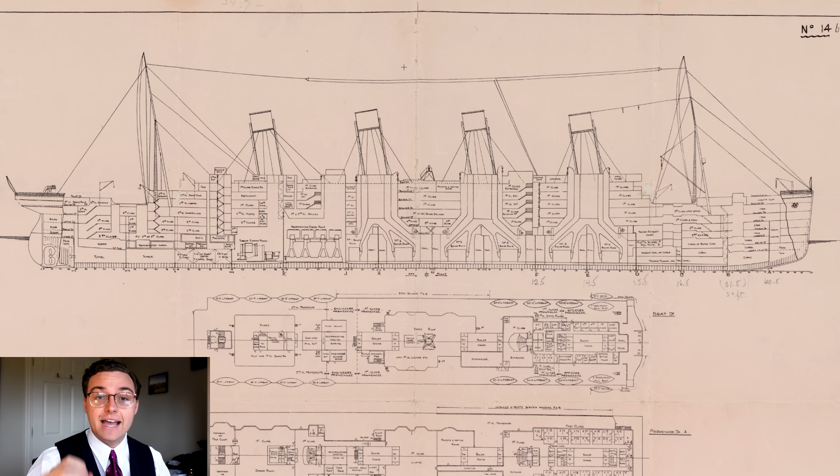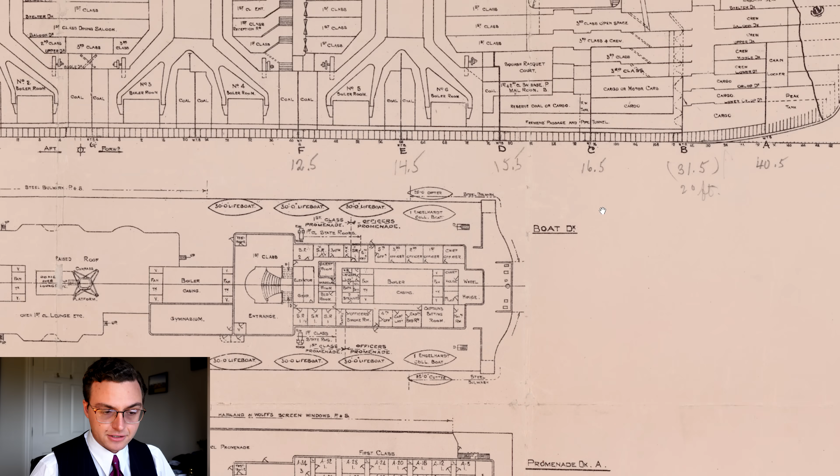Now, just to zoom in and give you a bit of an idea of what these plans look like in the first place. They're pretty basic looking when you take a look at the side profile here. It's a very simple layout of the side profile of the ship, the general arrangement, the decks and that kind of thing. But where there's a lot more detail is down here on the decks below.

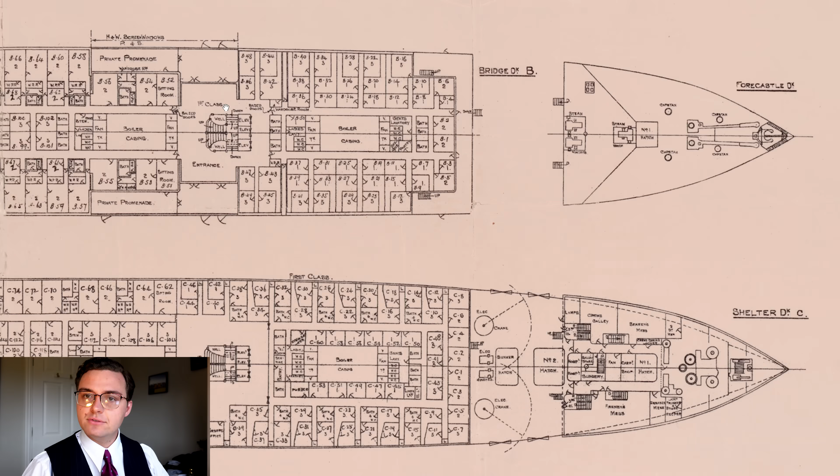Now, unfortunately, this one only goes down to C deck. So it shows all of the exposed decks where you would have had literally decking, weather decks exposed to the elements. And then everything below, D deck, E deck, F deck, we can't see. The truth is, though, these are probably some of the more interesting decks on Titanic. So let's have a look through and see what this tells us about the Titanic, and some of the differences between this plan and some other plans that you might find online.

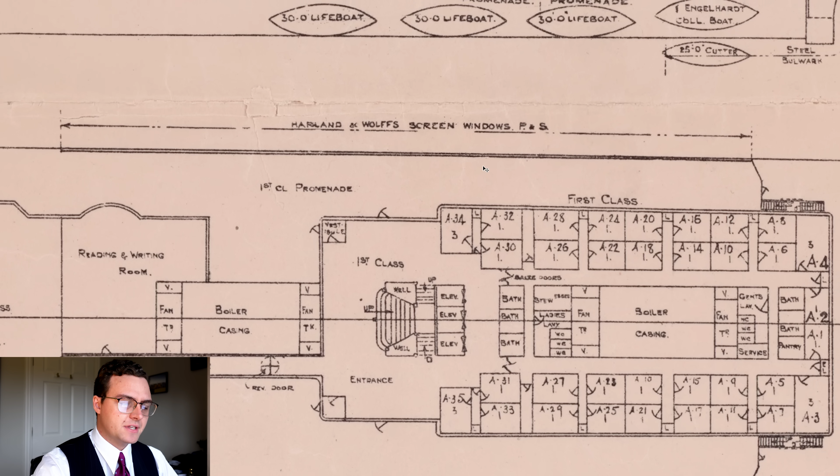Now, already what's kind of unusual about this plan that marks it out as being a little bit different to others is that, for one, it shows that they installed the screens. So the Titanic's promenade was half enclosed to provide some shelter for first-class passengers when they were walking. And it's actually been marked out on this plan, which is unusual because this was a very, very late addition to Titanic. She had originally been intended to have this large exposed open promenade like Olympic had,

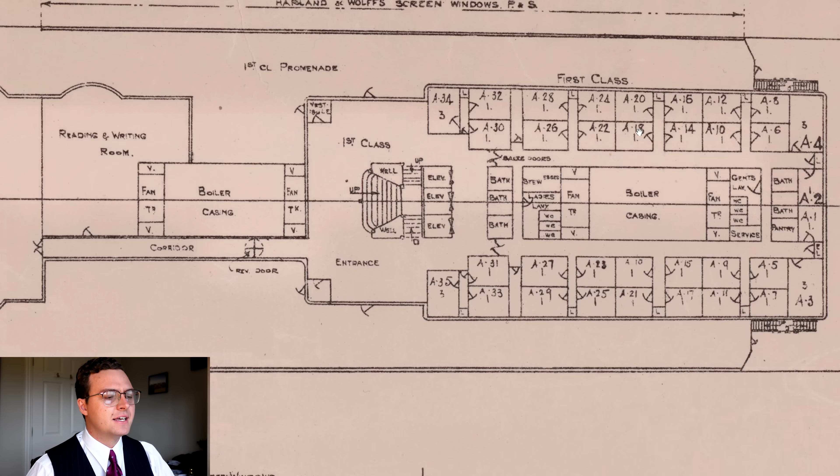except that in the event, Harland and Wolff down on B deck, with White Star Line's direction, ended up converting what was a very, very long enclosed promenade into some of the finest suites on the ship. Beautiful staterooms and things on B deck. So you can see here on the port side, we've got B18, B22, B28. On Olympic, at the start of her career, these didn't exist. This was just a clear walkway.

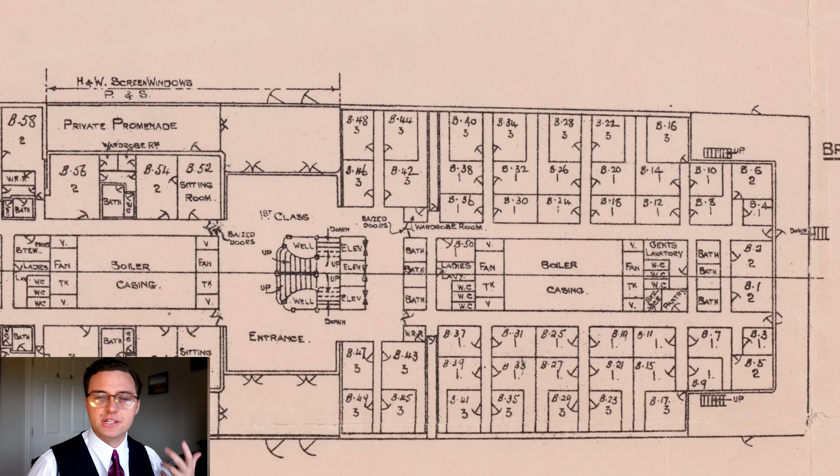And eventually Harland and Wolff, with White Star, after doing tests on Olympic and seeing how she was going, realised that actually people probably aren't really using it that much. That's a lot of walking space just for first class. Better to use that tonnage, that internal space, for things people can spend money on, like, for example, nicer staterooms. It meant, though, that they deleted the enclosed promenade. Now, to counter that, they put some screens up on A deck, which was the open promenade, converting it to like half and half, which would have been pretty nice and sheltered.

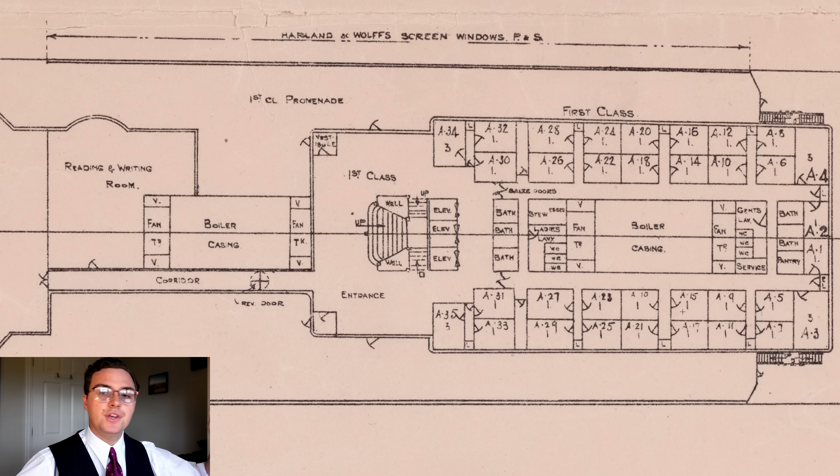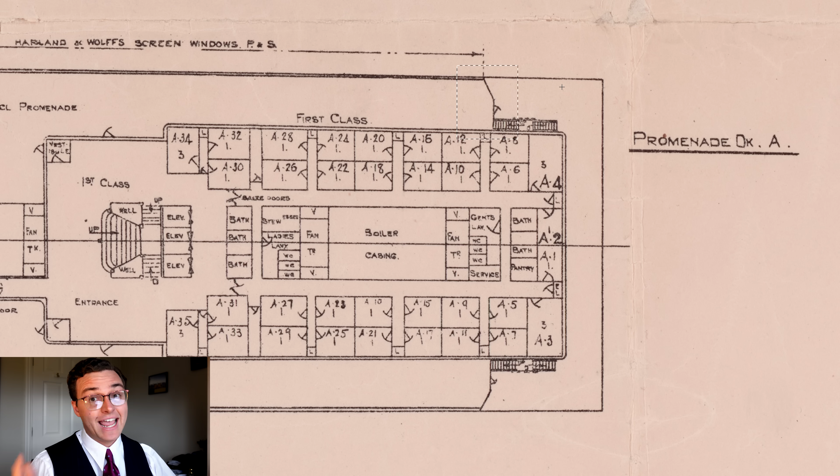You can see actually at the forward end here on A deck, there are these screens with doors on them, so that would have prevented wind from ripping down the promenade deck. Anyone who's ever been at sea on a big ship like this or taken a transatlantic voyage knows just how windy it can get even during the summer. The ship's already doing 21 knots, 22 knots forward, there's a lot of wind coming back at you, especially if you've got a headwind, then it's kind of like double that speed. So anything you can do to give as much protection to your passengers is a bonus.

So on Titanic, they've installed these doors. What makes the plan a bit weird is that they've actually marked it out on the plan where the screens are and where they end.

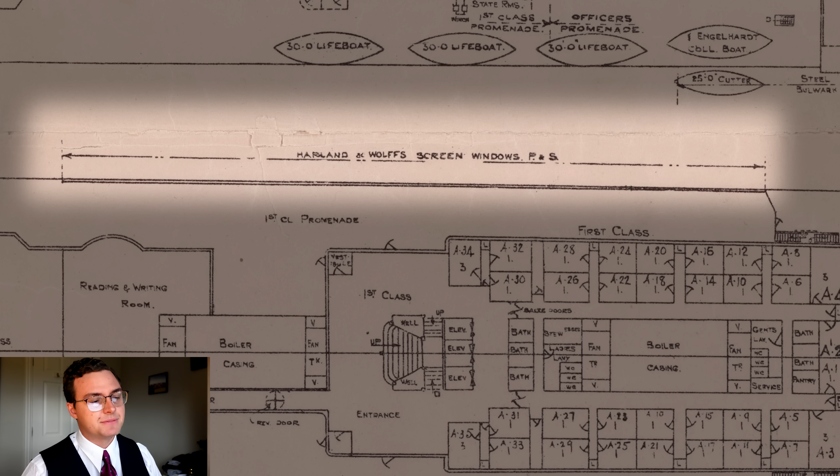Which, like I said, is pretty unusual because this was a last-minute change to Titanic's design. Relatively last minute. You can see when she's being fitted out, that promenade's nice and open. It's led a lot of people to kind of get confused and mix photos up between Titanic and Olympic. But it's a little bit unusual to have a period plan.

So one thing I've always wondered is, why does this plan exist? Why was it made? And I've never really known the answer to that. I had assumed, because it was in the American National Archives, that it had somehow got to America. Great assumption on my part. Why? Well, we know, of course, that there were a series of inquiries into the Titanic disaster, the first headed up by US Senator Smith, right after the disaster in 1912.

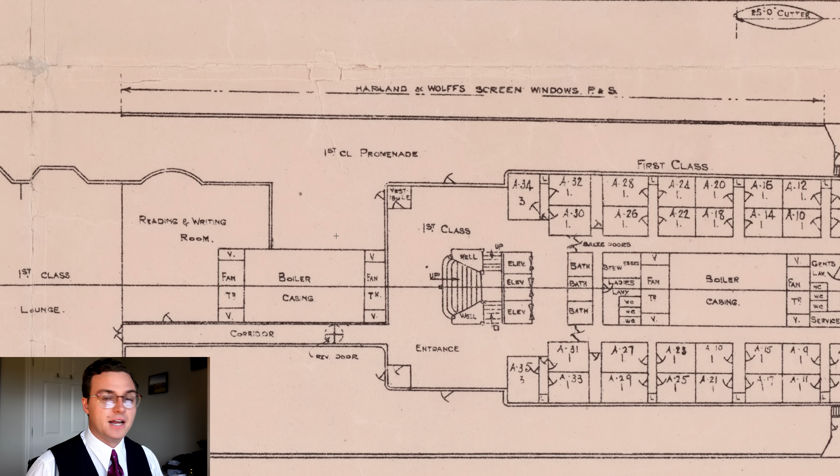But a friend of mine, a researcher, Troy Cullen, who works with Titanic Honour and Glory, told me that these plans probably date to about 1915, when there were further hearings for limitation of liability and that kind of thing. All the claims that were being heard by the White Star Line. We did a video on that just recently. It's a really interesting story.

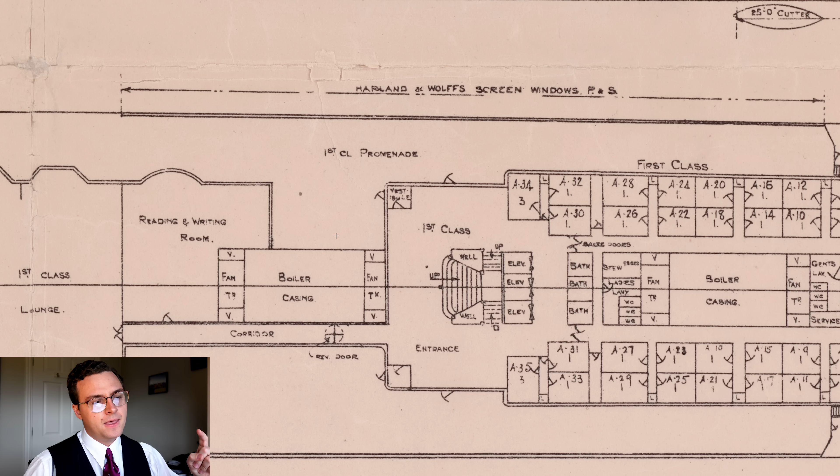And so these plans were used to essentially show where the particulars of the ship were, explain how people might have got to the boats and that kind of thing, because they were trying to find if Harland and Wolff or White Star Line might have been liable for the loss of their ship, damages, loss of life, and that kind of thing.

The reason the location of the screen installations here is important is because if you look at the decks above, you can see that there are lifeboats gathered forward, and of course the deck below, A deck, is screened off there. This kind of had an impact on the night of the sinking, because Captain Smith had ordered his boats lowered to A deck where they could be boarded by passengers, because that was the right thing to do. That was the official evacuation plan for the Olympic class, Olympic and Titanic.

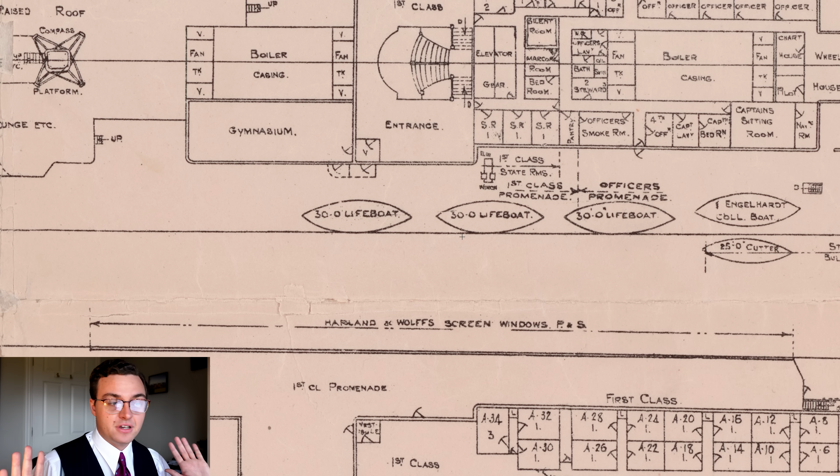Obviously neglecting or forgetting the fact that the forward boats had been screened off, and there were these windows there which had big hand cranks. The crew needed to go and find the cranks, try and get the windows down. In the event, one lifeboat was half lowered down to A deck and kind of neglected and forgotten about for the rest of the sinking right until the end, because they couldn't actually get the windows down in time. And eventually it got away. But obviously it created a little bit of confusion.

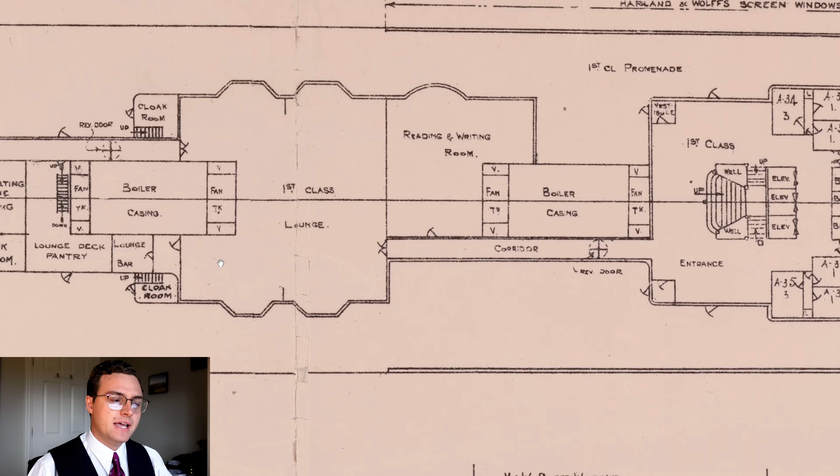So with that last minute addition, they probably didn't update the evacuation plan, or if they did, Captain Smith, in the event, kind of forgot about it. So it's interesting that that screen change is included on the plan here. Whereas down on B deck, if we look down here, now this is towards the stern of the ship, another big change that they made to B deck was the addition of a Cafe Parisien on Titanic.

Now this was meant to be a nice light and airy kind of cafe, and it was clearly a very last minute change, because in essence, the restaurant here, the à la carte restaurant, sometimes called the Ritz restaurant, was additional to your fare. You had to essentially pay extra, so you ordered off the menu like you would in a normal restaurant. It wasn't included in your first class fare. It was so popular on Olympic that they ended up extending it out on the port side of the ship, the left-hand side of the ship.

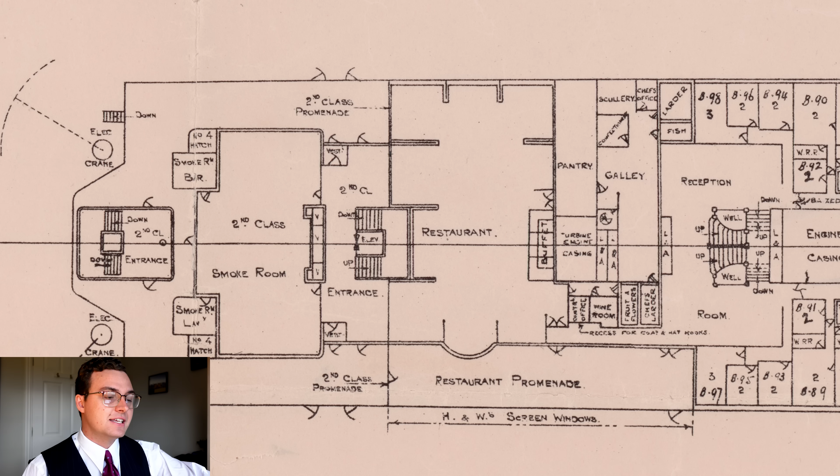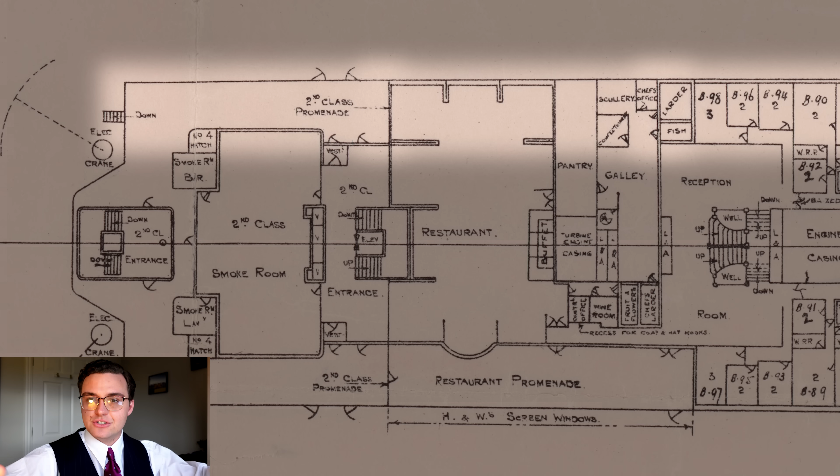So you can actually see here, it's very clear to see where they've made these clever changes, because the cabins are over here on the right, the promenade is over here on the left, and in the middle you've got the restaurant. Now, originally on Olympic, that was all open promenade, so you can actually follow the line of the bulkhead where it would have originally been, here's where the inside of the ship ends and here's where the promenade is. But White Star Line has very cleverly used this space for new things, new rooms, that kind of thing.

Now, on the starboard side of the ship, on the right-hand side, the White Star Line had made provisions for what they had originally termed a restaurant promenade, and it seems to me that they've just kind of reserved this space, partly because one of the criticisms of Olympic's original design is that this was originally second-class promenade, and they could look in the windows at the first-class passengers eating lunch and dinner at the restaurant, which is probably not what you want. A little bit voyeuristic. So there was originally a plan to just maybe have a promenade there, and they maybe didn't really know what they wanted to do with the space.

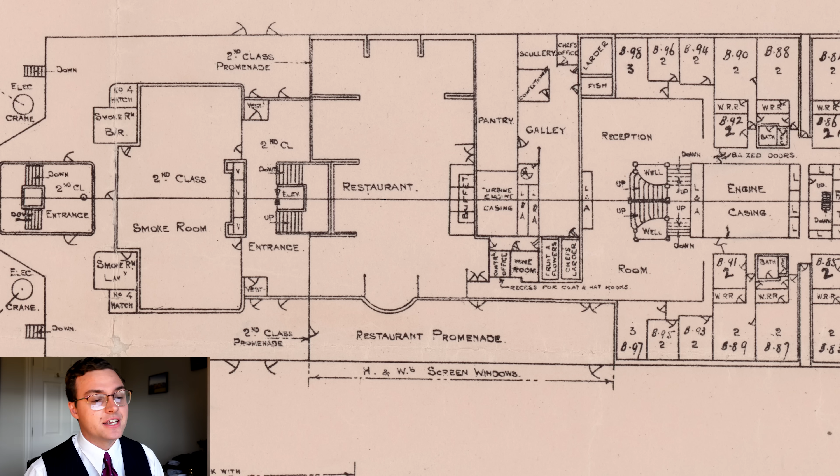In the end, in a very clever, again, last-minute change, they installed what they called the Café Parisien. It was essentially just lattice work on the wall so they could have ivy placed on it to make it look like a garden. I'm fairly certain the ivy was fake. And then just some very light wicker furniture. And boom, you've now got a new space where passengers can kind of sit and sip their tea and just relax. And it ended up being extremely popular.

More popular than other first-class spaces on the ship, like the reading and writing room, for example. And so, in the event, it was also put on the Olympic and slightly improved. The decor was a little bit nicer. So yeah, it's a really nice little room. But it's interesting that on this plan, you can see that they still kind of didn't really know what they wanted to do with it, and they just called it a restaurant promenade. Like, oh, we'll just put a restaurant promenade here.

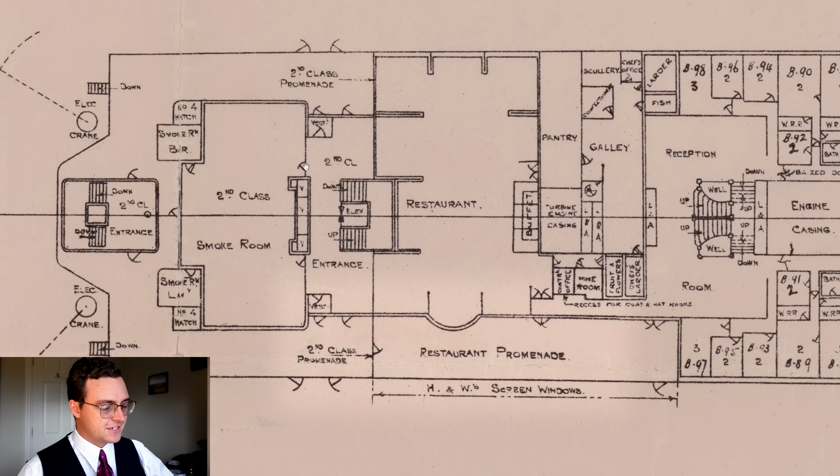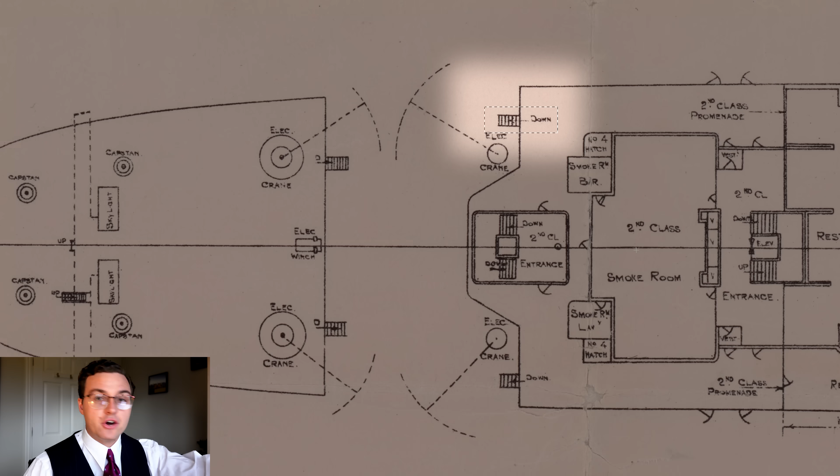One of the other things interesting about this plan is that on a lot of plans called Titanic that are clearly actually Olympic, you'll see that these stairs in particular here that go down from B deck into the well deck at the stern of the ship are in the correct position that they were when the ship was finished. They're sort of centrally located right at the end of the promenade there on either side of the ship. But the original plan for Olympic and Titanic had them coming out at a really awkward angle just here. So they would splay outwards from either side of the second class deck house here.

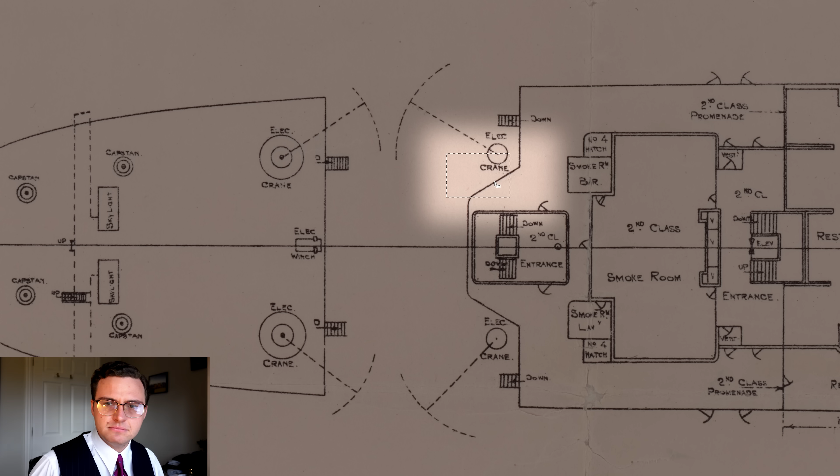And why this was changed, I don't really know. When Olympic was being built, they changed it. And the stairs, in theory, would have been really just used for crew to get around the ship, because the space below this, the well deck, is for third class. But the space above this deck that we're looking at here, this is a second class space. So it's gated. You wouldn't have had passengers going up and down there. Presumably, maybe it was just a little bit awkward having the stairs splaying out like that. They might have got in the way a little bit. So in the event, they changed it.

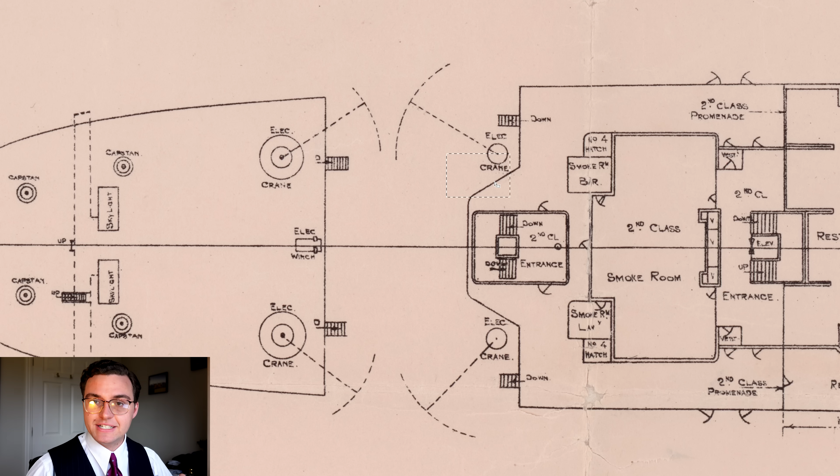These are the kinds of stairs that passengers complained about being locked during the sinking. There were little gates, they're about waist-high, and they did separate third class from second class, and even first class spaces at the forward end of the ship. But they weren't the kind of Bostwick gates we imagine when we picture third class people being locked below deck on Titanic. They were really just maybe waist height and very easily crossed over.

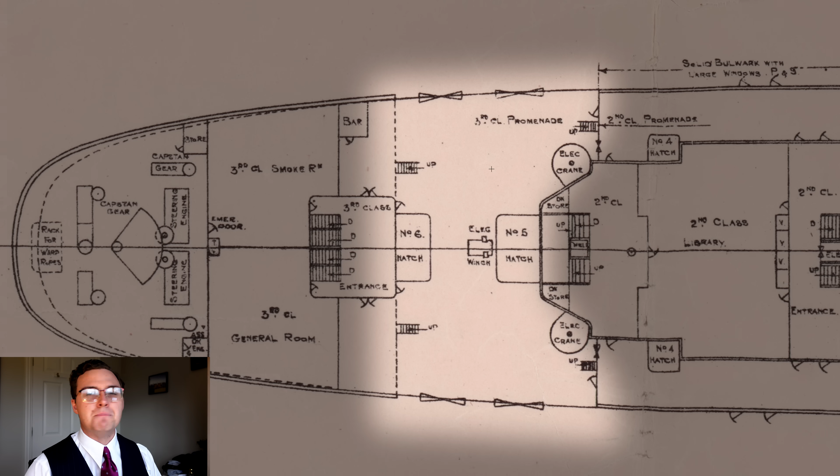In the event of Titanic sinking, actually, a lot of passengers did gather down here in third class, down on the well deck. The boat deck is about 2 or 3 decks above, and the stairs and the ladders leading up there had these locked gates that are, again, only waist high. And although they're not really much of a physical barrier, they serve to be more of a mental barrier. These are people in a very class-based society, and there's a gate there with a sign saying essentially third-class passengers not allowed beyond this point. And although you could very easily climb over it, step over it, it creates a psychological barrier to doing so.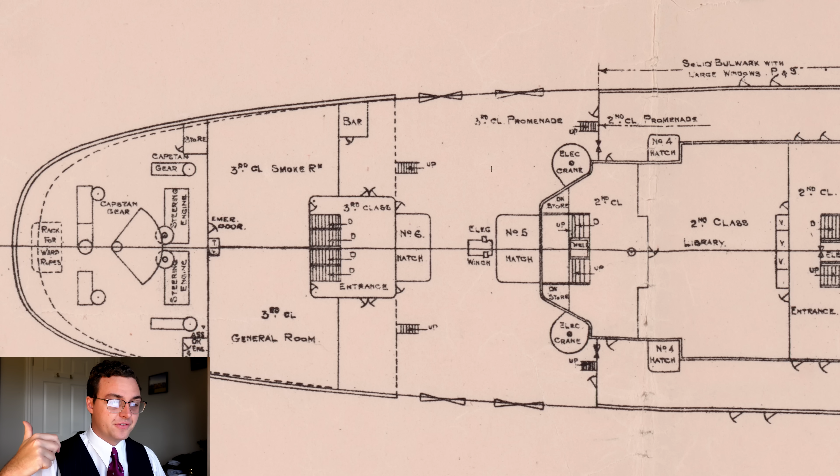And so it has to be said that in subsequent inquiries, the findings from the British inquiry and the limitation of liability hearings were that no passenger of any class would have found it harder, essentially, to get into the boats. That each person on board had equal chances of getting into a lifeboat. Which is ridiculous. The third class are berthed way, way, way below the boats, forward and aft of them.

They'd never been up to the boat deck, they hadn't conducted drills on where to go in the event of an emergency, and then you had these gates that, even though they aren't the ones you see in the movie where they're literally locked shut, floor to ceiling, they're waiting there for instructions. Some of them have got their bags, and they waited down here, and help didn't come. No one came really to get them.

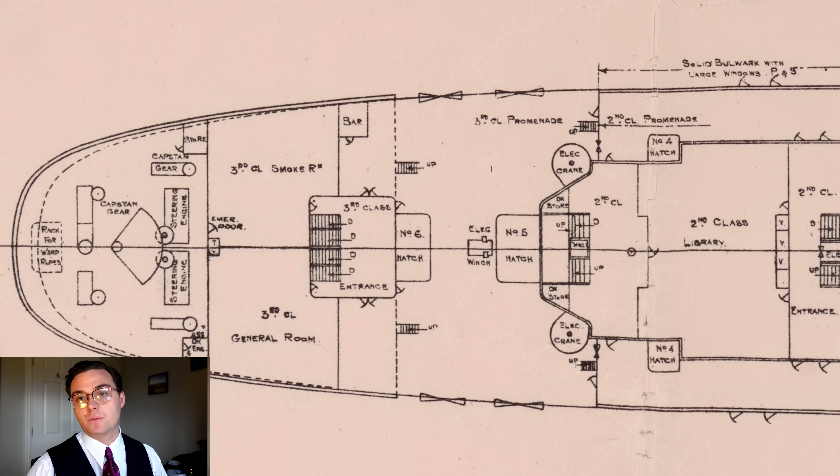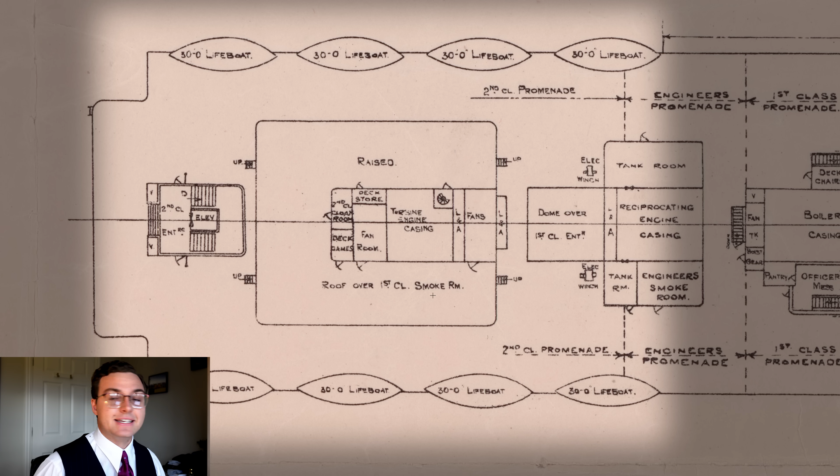A lot of them were stuck waiting around until the very end, when there was a little bit of effort to go and gather third-class passengers, and some just kind of found their own way forward, because it's really tricky to get from this place here, the third-class promenade, the well deck, all the way up here to the boat deck, because there's no direct external connector between these decks, apart from very, very small vertical ladders that you can see.

One marked here on the plan, which again is very interesting that they've included that very small detail, and two marked down here on either side of the A deck terminal, the end of the A deck promenade.

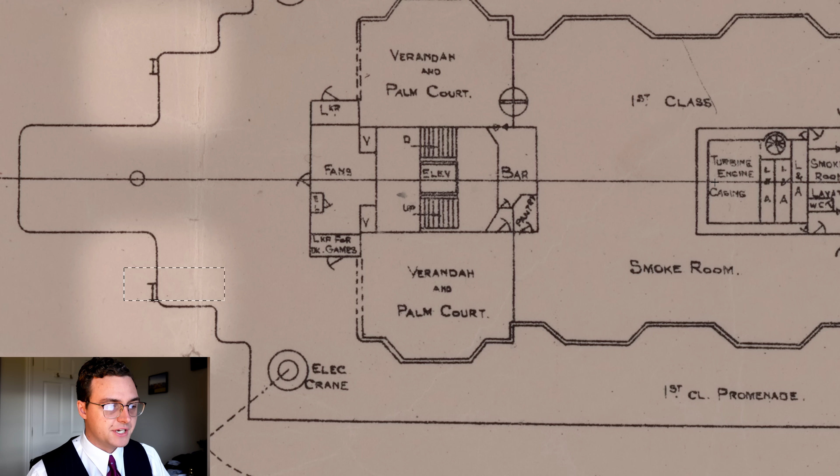Looking down on C deck, because I think we've done similar videos to this before, and we haven't talked a lot about C deck, even though I think it's a pretty interesting deck as far as Titanic's concerned. You can see, first of all, how densely packed with cabins it is.

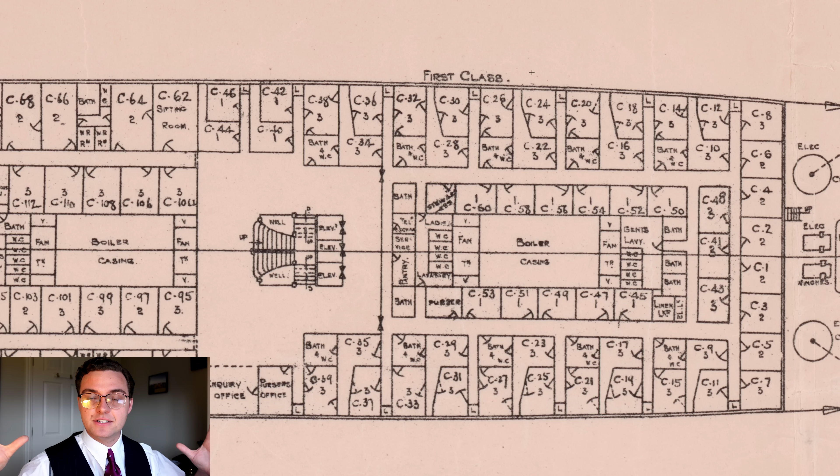So designing a ship is really just an equation. You have to get as many people as you can into a single hull. And then that will dictate how many people are willing to pay for tickets, how many people you can actually fit, how much fuel you'll have to take to carry them a certain distance. So you're constantly balancing. And so Harland & Wolff had the challenge of using this huge hull, 45,000 gross registered tons, the internal usable volume of the ship, and filling it with as many staterooms as they could.

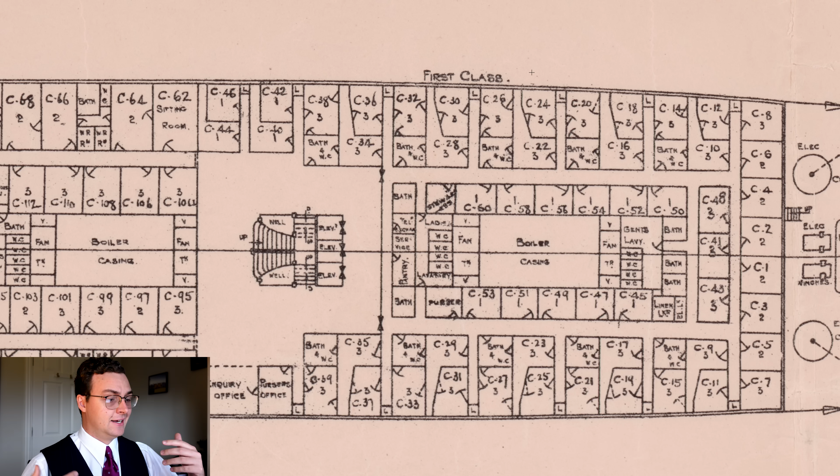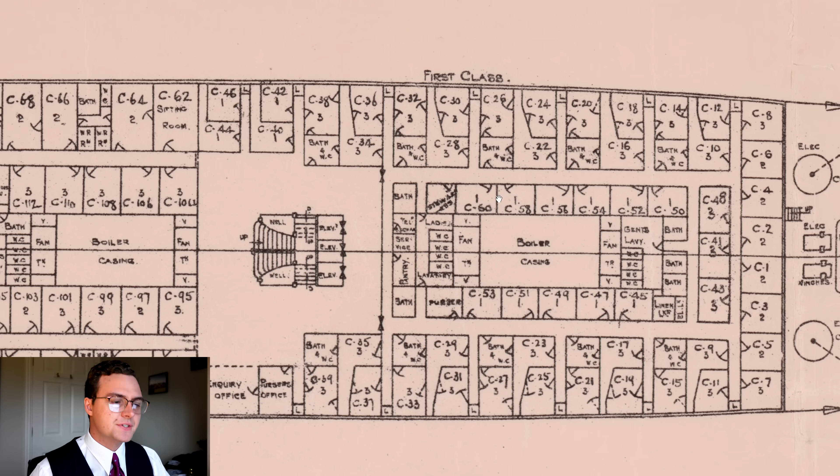It meant that en-suites and toilets and things, en-suites weren't a thing back then. It was extremely unusual and rare. Ships started to kind of do it towards the end of the 1910s, the beginning of the 1920s, as standards changed. But back then, life was a lot more communal, and private bathing wasn't very common on liners. And so you see a lot of bathrooms built into hallways.

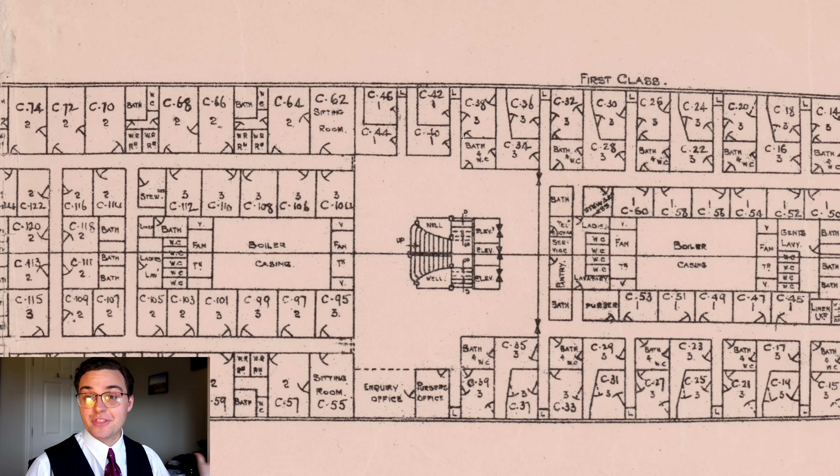Now, that's a funny mental image because we like to think of this as the ultimate in luxury, and the horror that you might be spotted by a gentleman in his beautiful white tie coming back from a card game when you're standing there in your pajamas waiting to use the loo.

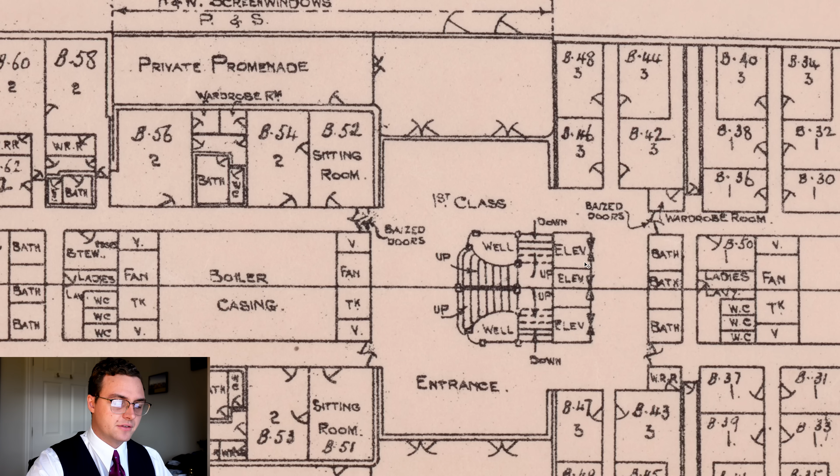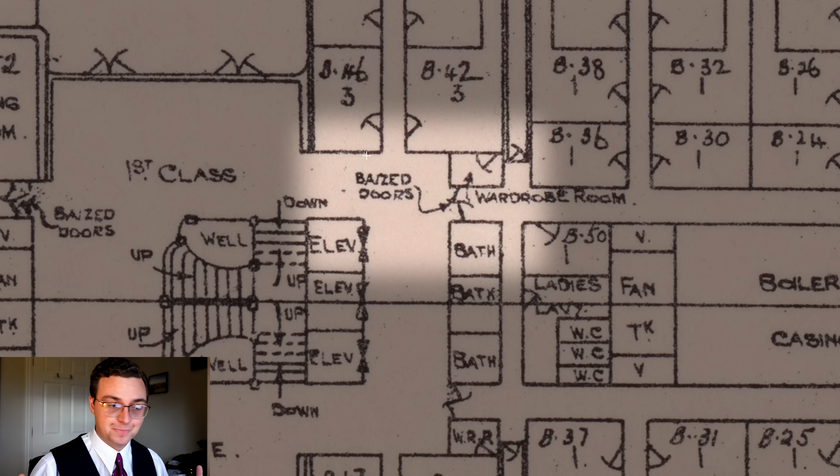To kind of provide a little bit of privacy, you can see that the corridors were guarded by what they call baize doors. Now, baize doors are essentially doors with a fabric or leather covering on them. It looks nice, first of all, but also has a very practical purpose. On Titanic, it meant that there was a door on the corridors, so maybe the corridor is a little bit more obscured from view, so if someone's doing a late-night toilet run, it might be harder to see them. Titanic's had portholes in them, as far as I can recall, but at least it was a little protection.

But the other thing here is sound. Sound travels through old ships like this like nothing else. I don't know if any of you guys have stayed on the Queen Mary, for example, but the deck plating and the bulkhead plating is extremely thin. And you can hear everything. I was kept awake at night on the Queen Mary by people doing all kinds of things in the middle of the night, and you really can hear everything.

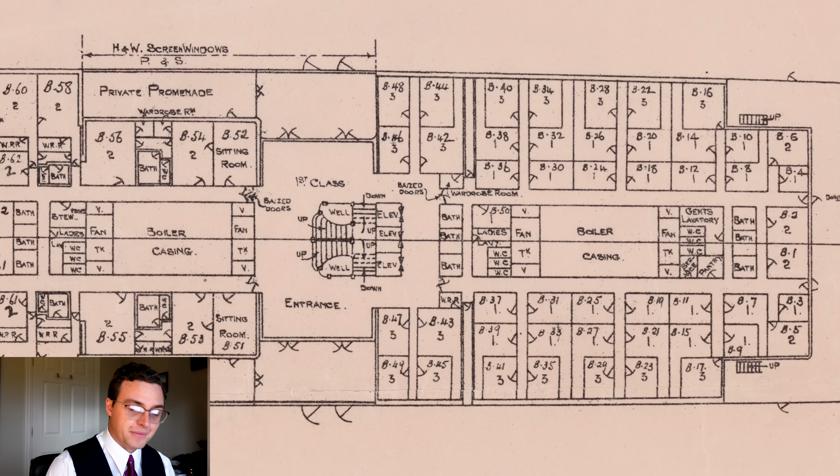And I don't think it really makes it into the books or the written experience of what it was like to be on ocean liners back in the day, because that's just kind of how life was. People were used to it. Whereas it's kind of jarring to stay on a modern ship today where it's really, really well insulated and the steel is a little thicker and you can't hear as much, and then go on a ship from the 30s or before, and you just kind of hear everything.

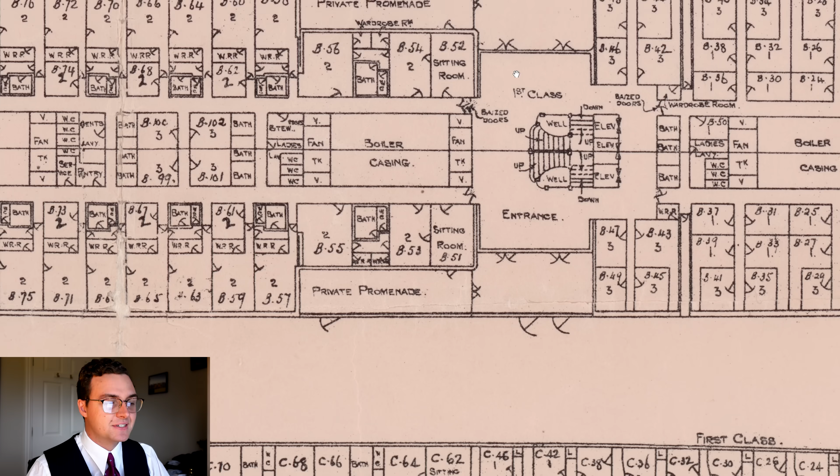So they were doing everything they could to make it so that people had their privacy and were also not being kept up by noise. And so having thick baize doors guarding your corridors meant that these big passenger public hubs like the first class entrance, the public rooms up here on A deck and things like that, where you've got a lot of noise of people gathering and congregating, the noise is not going to then disperse out into the corridor. So presumably these passenger blocks, we'll call them, will be a little more quiet.

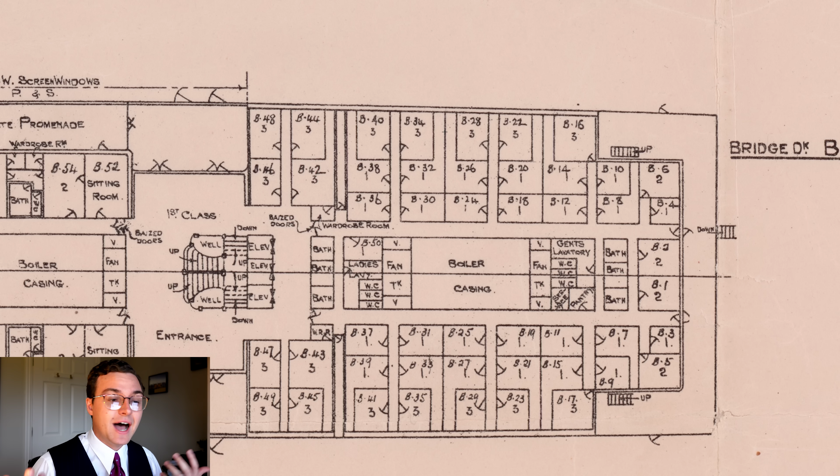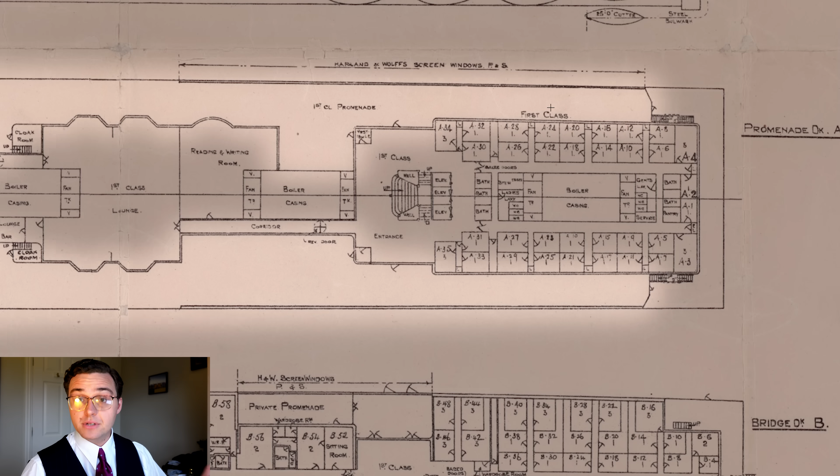Another thing that they did to kind of preserve people's quiet and peace was to put time restrictions on when people could do full deck promenading. So as part of the signage for the promenade decks on A deck for first class passengers, it requested specifically that at certain times of the day and night you didn't promenade past a certain point. Purely because you've got big wooden soled shoes walking on the decks. If you're walking past these staterooms up here on A deck, they're going to hear it.

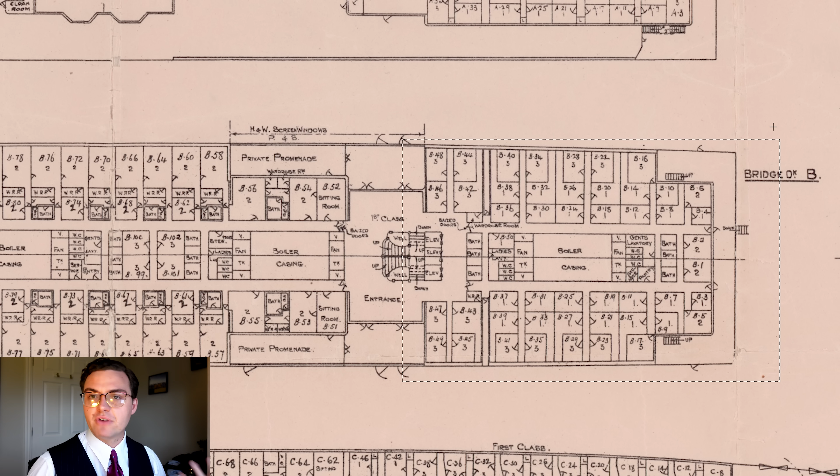But the people down here on B deck are going to hear it because you're walking right over the top of their heads. And again, you can really hear stuff on these old ships. And in the event of the sinking, a lot of crew and passengers were woken by commotion, people rushing about overhead and that kind of thing. And you can really understand why, because the decking is so thin. So yeah, Harland and Wolff using any opportunity they can to make things a little bit more comfortable for their passengers.

Now, one of the other things that's interesting about the plan is they show where the private promenades for the suites were located. So these were the most luxurious cabins on the ship. The one on the port side is most famous from the film Titanic, because at the start, the man's man, the valet, Lovejoy, says they're sending their things to staterooms B52 and 54 and 56. Kind of a weird choice. You can see them here. Bit of a weird choice because 52, 54, and 56 were actually occupied by Bruce Ismay in real life. Ismay was, of course, the chairman of the White Star Line, and he had the finest staterooms on the ship. He had 52 and 54 and 56.

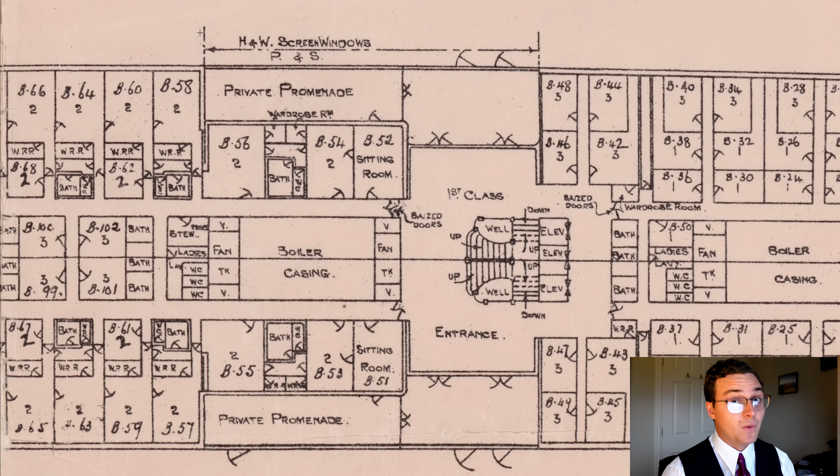The other side was occupied by a female passenger traveling by herself, Mrs. Cardeza, and she had the other set of suites. It's kind of weird that Cameron put the fictitious DeWitt Bukater family in 52 and 54 and 56, when it was occupied by probably one of the most famous people on the ship, and not the other one, which was slightly less famous.

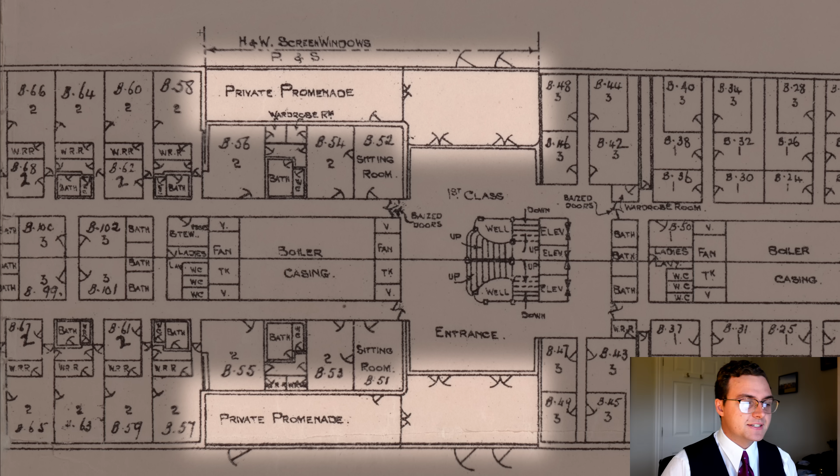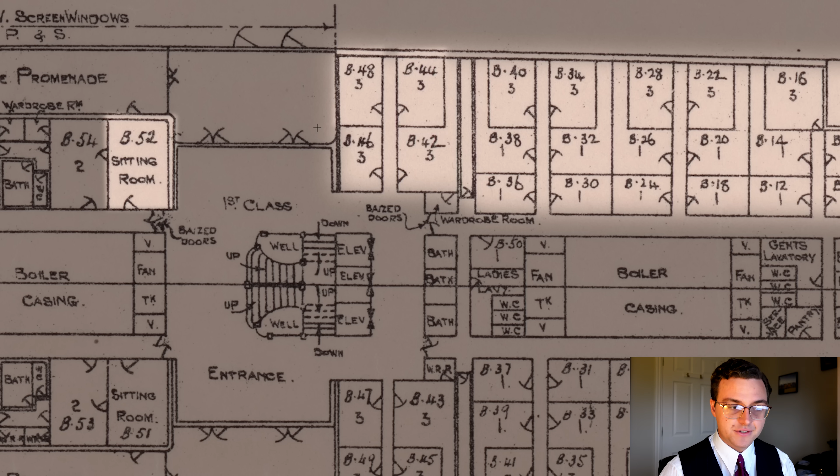Now, again, on Olympic, this private promenade setup really didn't exist to begin with, but they had learned enough from Olympic that, yeah, this was a really clever use of space. It's a great marketing tool, having this kind of Tudor private promenade look really, really nice. And so you can see that it's a fairly comprehensive setup of rooms, where you've actually got 56 here with sleeping space for 2, 54 with sleeping space for 2, and 52, which functions really just as a sitting room. So the sitting room for these private suites was bigger than many of these first-class staterooms forward of it, like B48, 44, this whole block. Those are smaller staterooms than just the sitting room alone.

So yeah, these were really, really nice spaces to occupy, extremely expensive, but you can see probably one of the biggest selling points of these is that they had their own ensuite, and not just their own toilets, but their own baths as well. And that's really significant, because you'll notice back here on this deck, there's blocks of baths, but there's not that many. There's 3 here and 3 here. So 6 baths for however many people were staying in here.

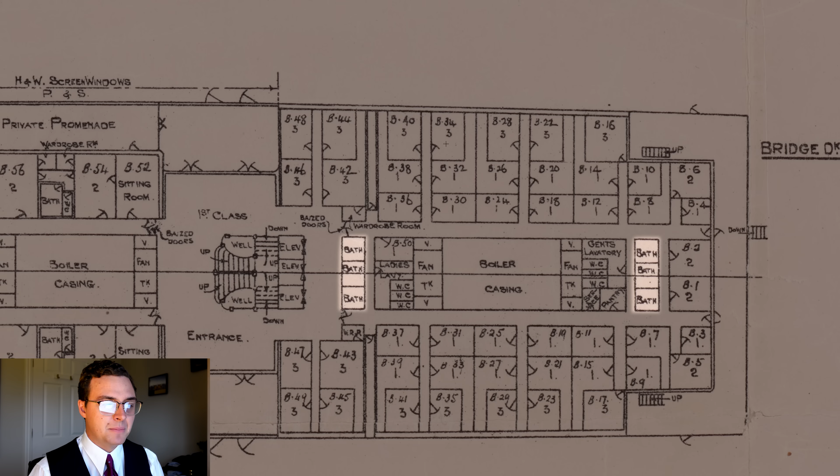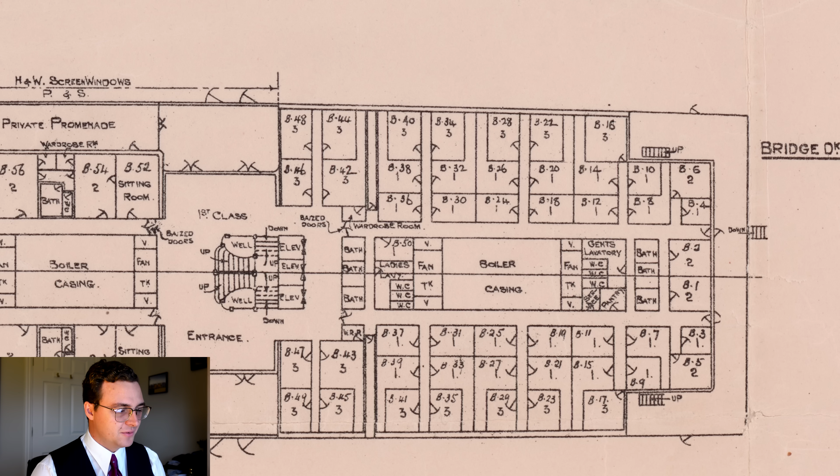The numbers below the stateroom numbers, B16 for example, here says 3. That indicates that there could be sleeping space for 3 people at a maximum. And they did that from having small bunks, fold-out couches that could be turned into beds and that kind of thing. So again, they're trying to get as many people as they can into the ship, and part of that involves having toilet blocks that are communal and kind of not distasteful, but a bit weird to us today in 2024. Yeah, this is a really interesting plan. It's pretty detailed, and it's also fairly accurate, which again is unusual for surviving period plans from Titanic's era.